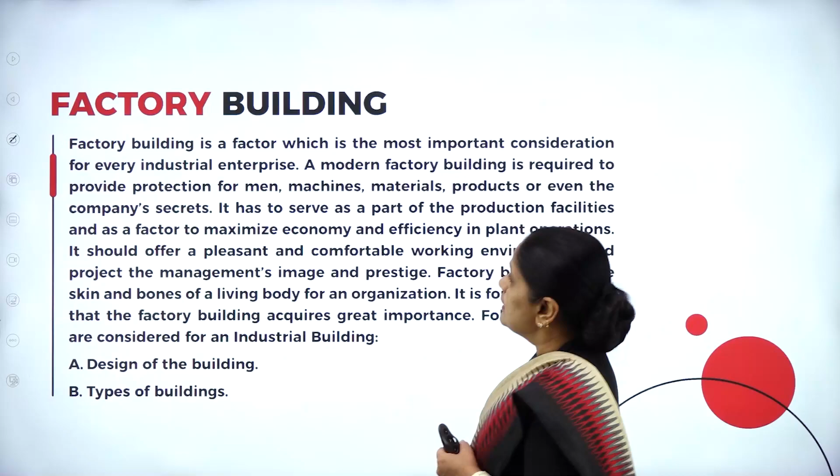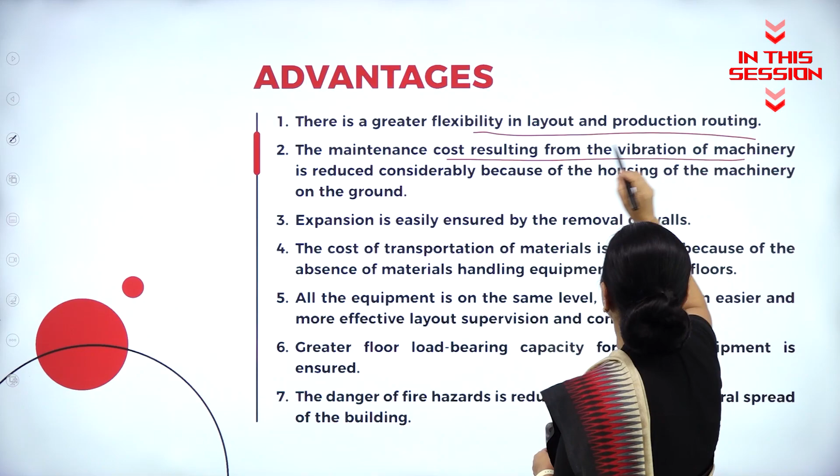The factory building is a factor which is the most important consideration for every industrial enterprise. The type of product that is to be manufactured determines column spacing, type of floor, ceiling, heating, and air conditioning. The maintenance cost resulting from the vibration of machinery is reduced considerably because of the housing of the machinery on the ground.

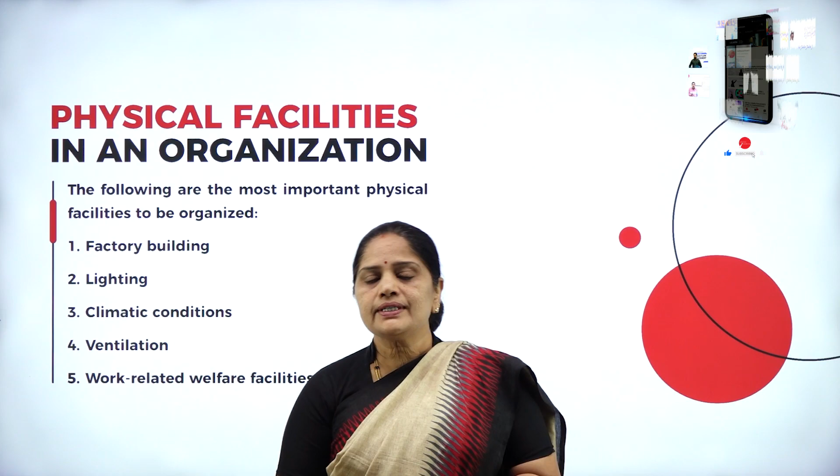In this session 2 of Unit 2, we will be having a discussion on the physical facilities in an organization. In the previous session, we had a discussion on the plant layout and also the plant location. How do we choose the plant location and how do we design the layout? We also have discussed the various types of layouts which are in existence. And in this session, we will be having a discussion on the physical facilities in an organization.

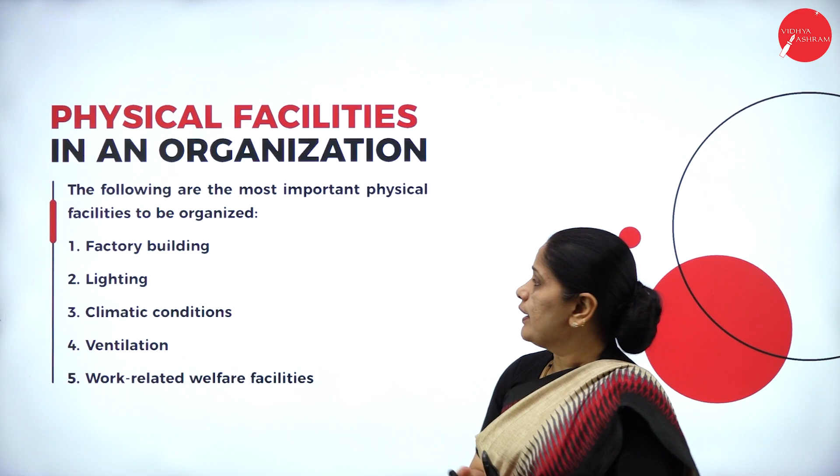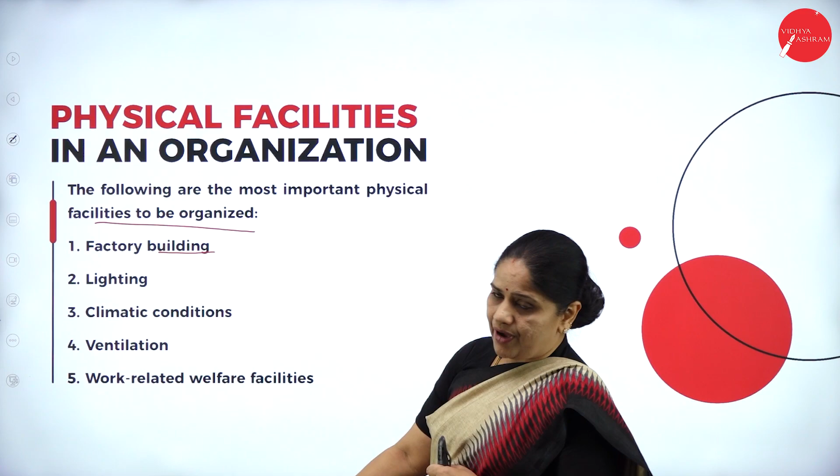Now, the following are the most important physical facilities to be organized. So, what are the various facilities which we need to design in the case of a plant layout or a factory layout? There are certain physical facilities. So what are they? The first one is the factory building. We need to have a proper factory building. Second and the most important one is the lighting. It should be well lit.

Third one is the climatic conditions. The fourth one is ventilation. Fifth one is work-related welfare facilities. These are the various physical facilities in an organization. Now, coming to the first one, the factory building. The factory building is a factor which is the most important consideration for every industrial enterprise. So, for every industrial enterprise, we need a factory building.

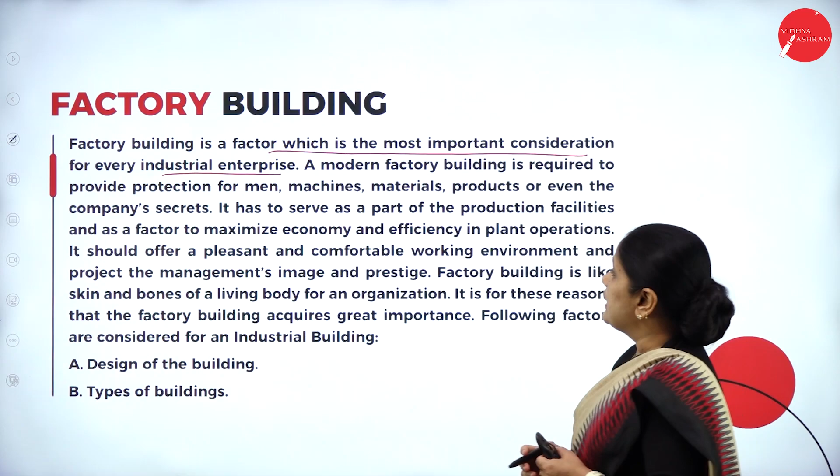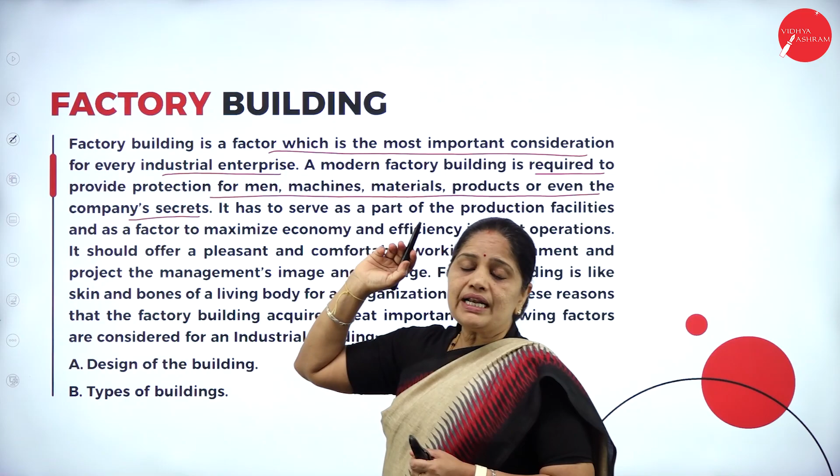A modern factory building is required to provide protection for men, machines, materials, products, or even the company secrets. A building is provided because it provides shelter for men, materials, and the machines, etc. In order to provide shelter for all this, we need to have a factory building. It has to serve as a part of the production facilities and as a factor to maximize economy and efficiency in plant operations.

So, whenever we are working in the factory, it should provide maximum economy and also efficiency in operations. We should try to see that there is minimum movement of men and materials within the factory. If we can reduce the movement of materials and men, we will be saving on the material handling cost and also the time and the various confusions which will arise when there is a zigzag movement of men and material in the factory layout.

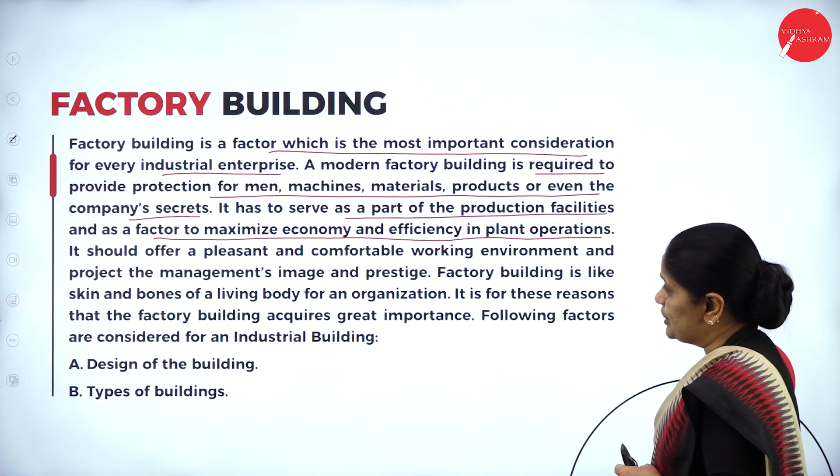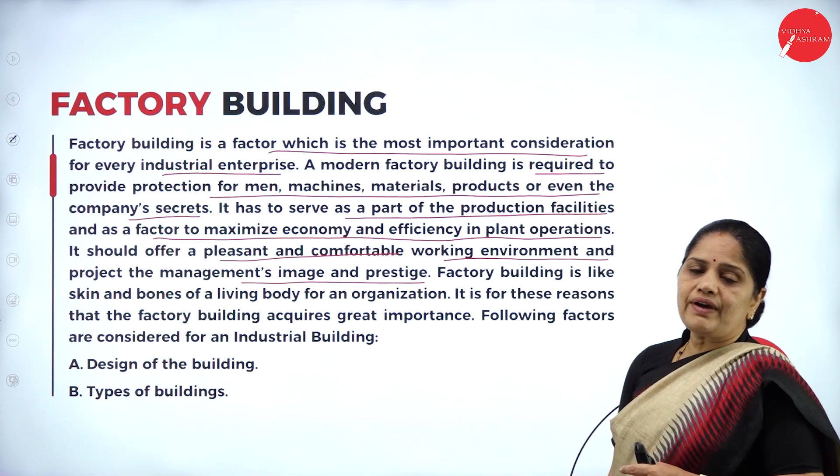It should offer a pleasant and comfortable working environment and project the management's image and prestige. The factory layout should be designed in such a way that it is comfortable and more pleasurable to work in. If the working conditions are very suitable for work, then workers will be stress-free and they will work with more diligence and more efficiency. But if the working conditions are not good, workers may not find it favorable to work in such an environment.

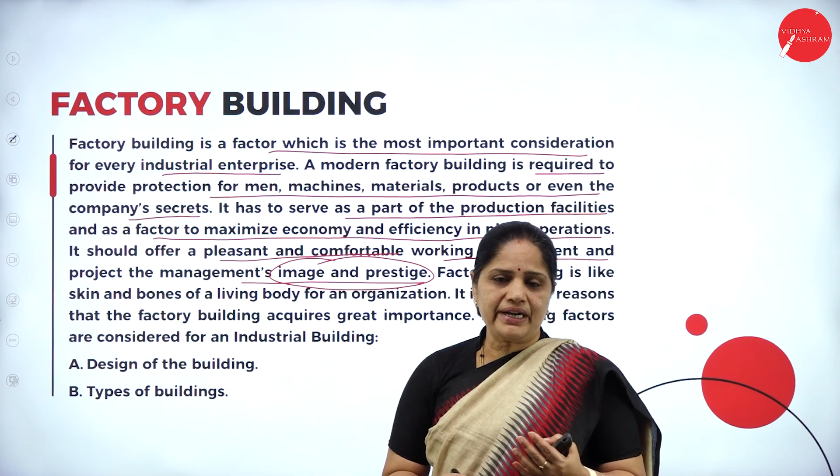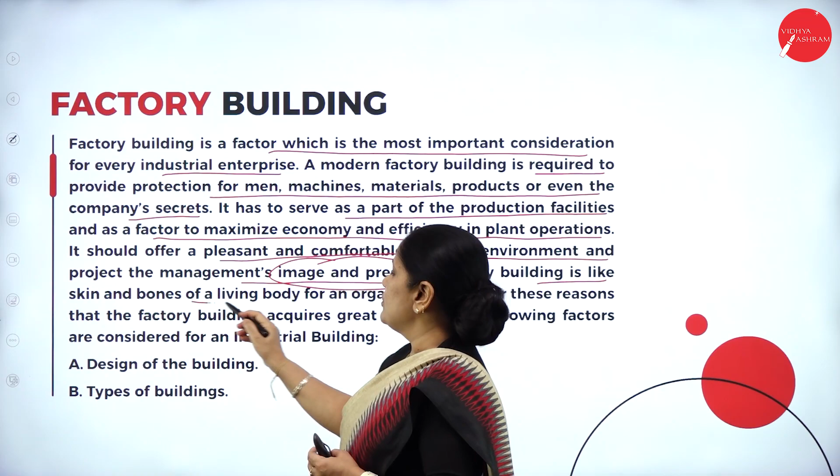So, the kind of work environment the management is providing will reflect on the image and the prestige of the management. Factory building is like skin and bones of a living body of an organization. Just like the human body is made up of skin and bones, the same way the factory building is the main factor for the success of any organization. It is for these reasons the factory building acquires great importance.

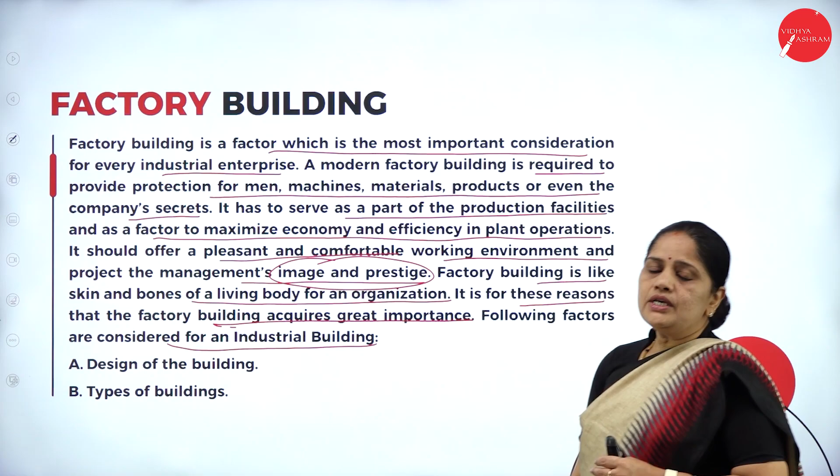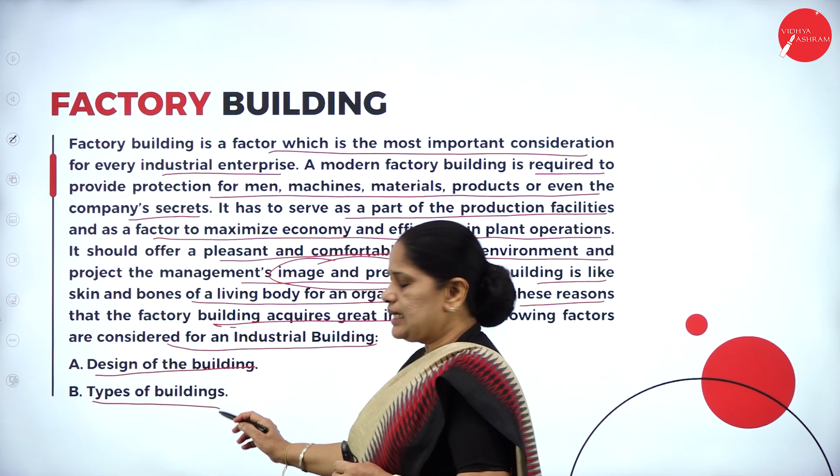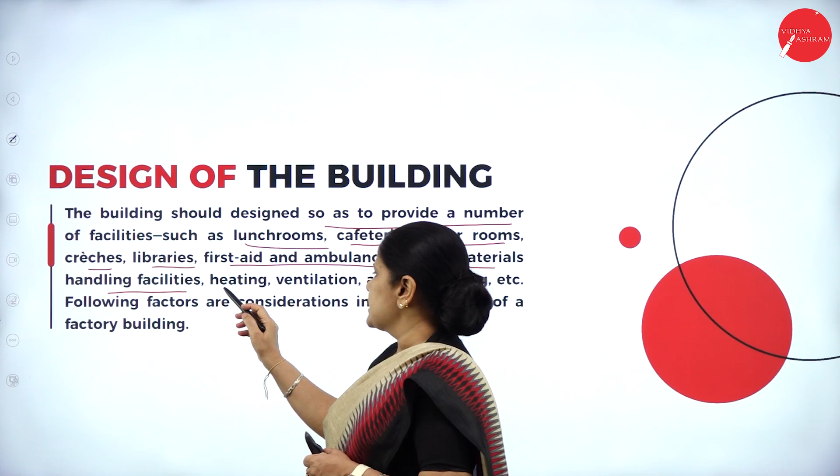The following factors are considered for an industrial building. In order to have an industrial building, there are two factors which we should consider. First is the design of the building. Second one is the types of building. So let us see what we mean by design of the building. The building should be designed so as to provide a number of facilities such as lunch rooms, cafeteria, locker rooms, creches, libraries, first aid and ambulance rooms, material handling facilities, heating, ventilation, air conditioning, etc.

So, the design of the building should include many provisions. Whenever we find so many employees working under the same roof, we should make some provisions for their stay there. So, what are the various facilities which we should provide here? The first one is the lunch room. The workers will be spending almost 9 to 10 hours in the factory building, and therefore it is obvious that they'll be having lunch.

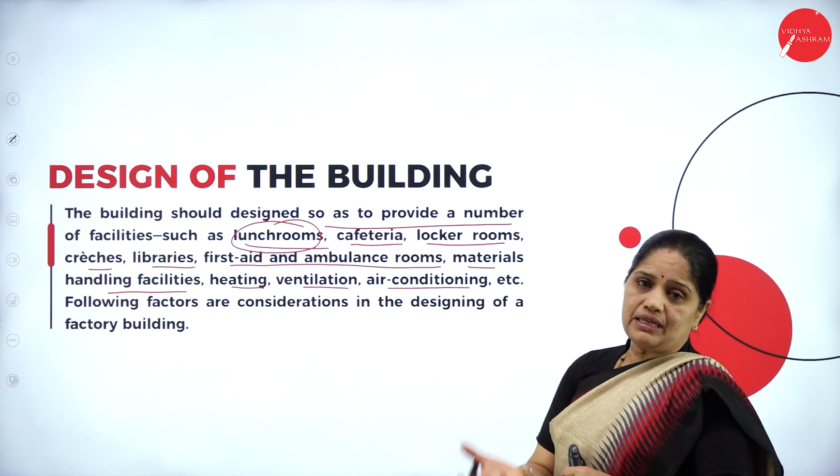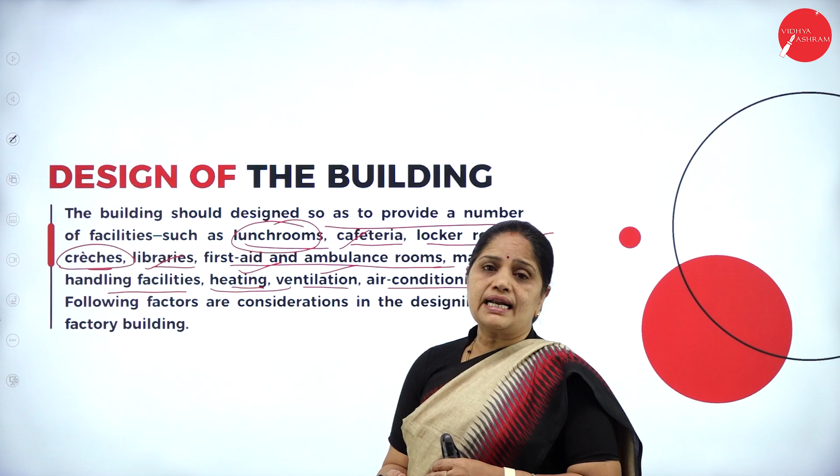So we need to provide a lunchroom, a cafeteria where they can have coffee, then locker rooms where the employees can keep their valuables, then creches, which is for the women labor. Next we have libraries, first aid and ambulance rooms, and material handling facilities. Whenever there is material to be handled, what facilities are we providing? What kind of heating facilities do we have? If it is a cold country, we should provide heating, then ventilation, air conditioning, etc. These are the various facilities we need in a factory building.

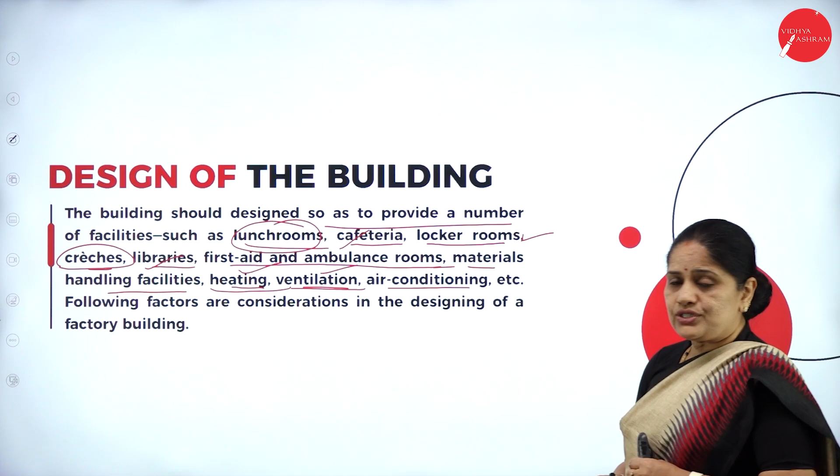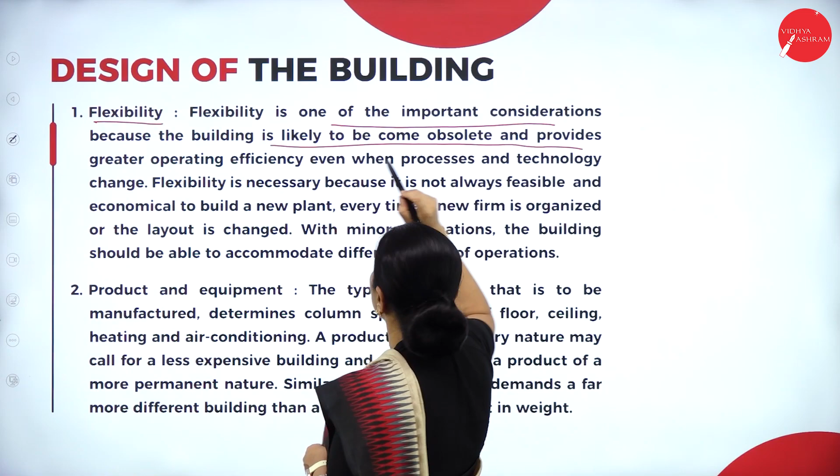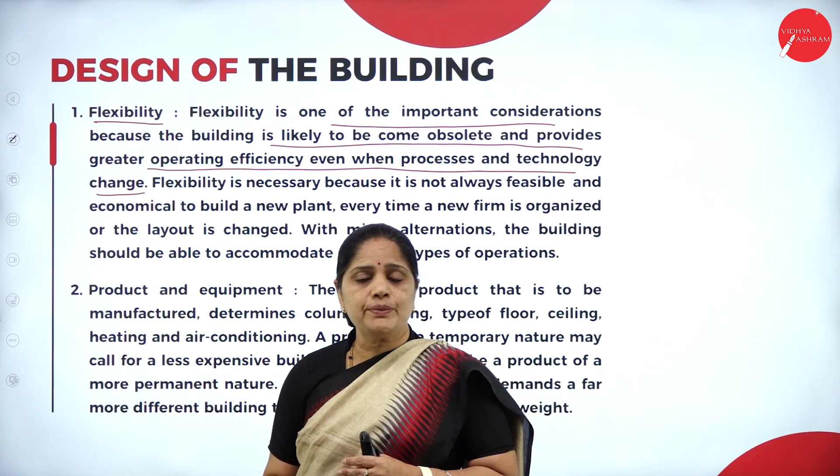Then the next one is the design of the building. How should we design a factory building? The first one is flexibility. Flexibility is one of the important considerations because the building is likely to become obsolete, and it provides greater operating efficiency even when processes and technology change. We all know that every day new technology is coming into the market, and the same is with the machines. Whatever machines we have purchased may soon get outdated, within a span of 2 to 3 years.

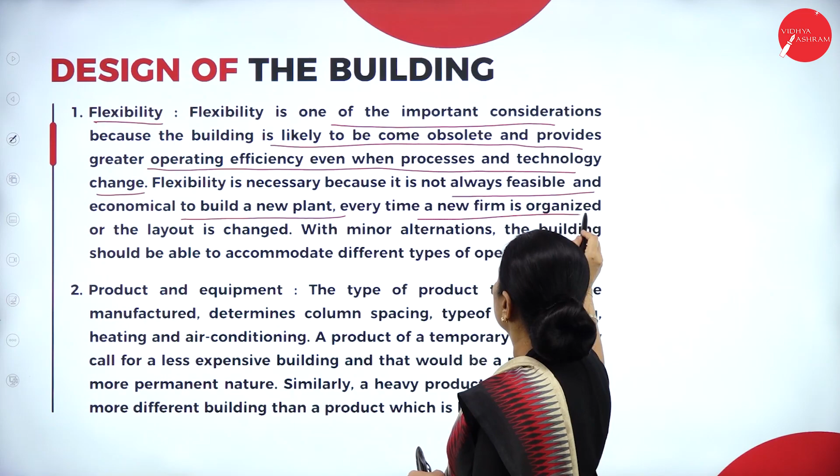As a result, we need to design the factory building so that there will be more flexibility and more room for new machinery, so the old machinery can be replaced with new machinery. The factory building should provide greater flexibility for incorporating the latest technology within the organization. It is necessary because it is not always feasible and economical to build a new plant every time a new firm is organized or the layout is changed.

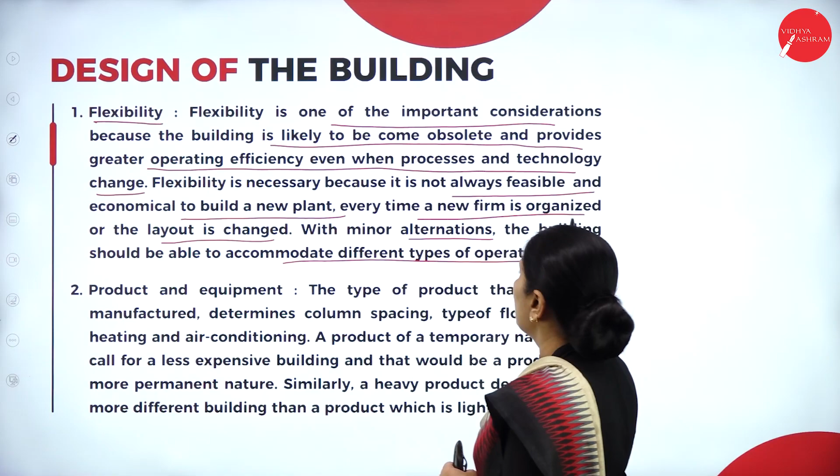With new technology, you will have to change the layout, but every time you change the layout, you need not change the building. The building should be flexible enough to overcome all the changes in the plant layout. We should ensure the building is flexible with minor alterations and able to accommodate different types of operations. With a minimum of alteration to the building, we should be able to accommodate the latest technology in the plant layout.

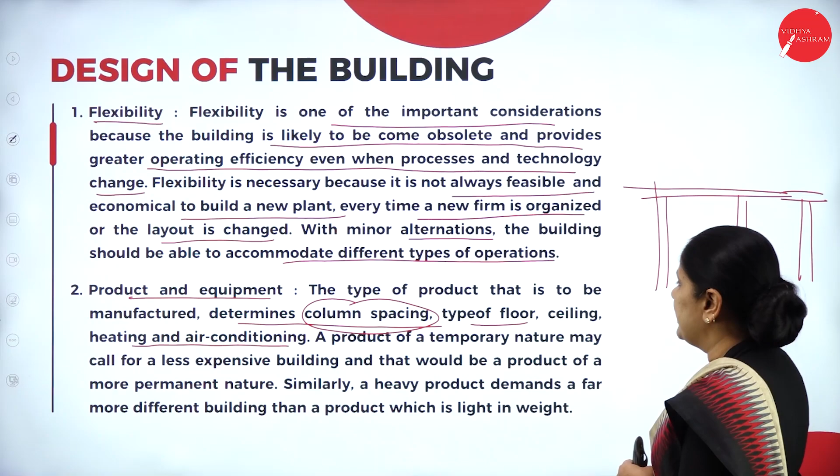Then the second one is product and equipment. The type of product to be manufactured determines column spacing, type of floor, ceiling, heating and air conditioning. Column spacing means where the pillars will be erected for the factory building. Then type of floor, what kind of flooring you need. Then ceiling, what kind of ceiling you have. Then heating and air conditioning.

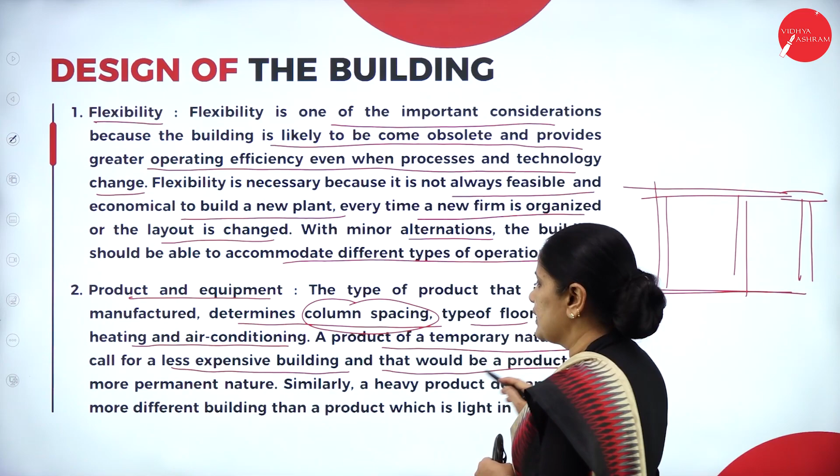This is essential. A product of temporary nature may call for a less expensive building than a product of more permanent nature. It all depends on the type of product being produced. If it is a temporary product, we need not have a more expensive building. But if the product is of a permanent nature, we need a building which is stronger and able to withstand all the vagaries of the weather.

Similarly, a heavy product demands a far different building than a product which is light in weight. So depending on the nature of the product, if it is very heavy, we need a different building, and if it is lightweight, we also have a different design of the building.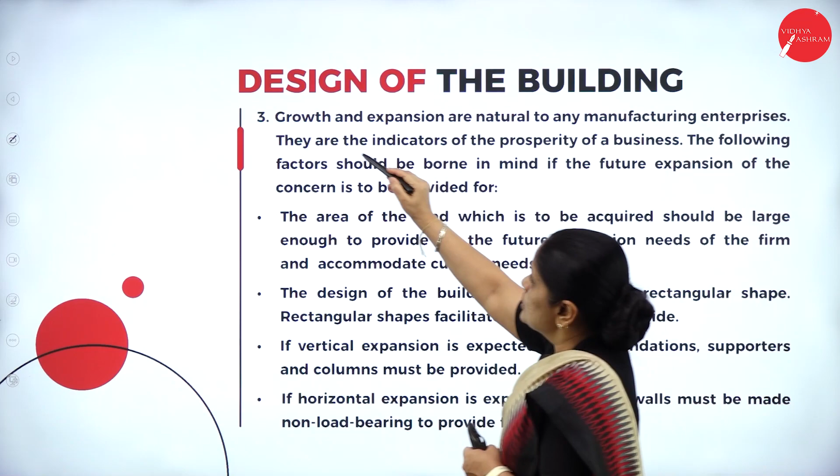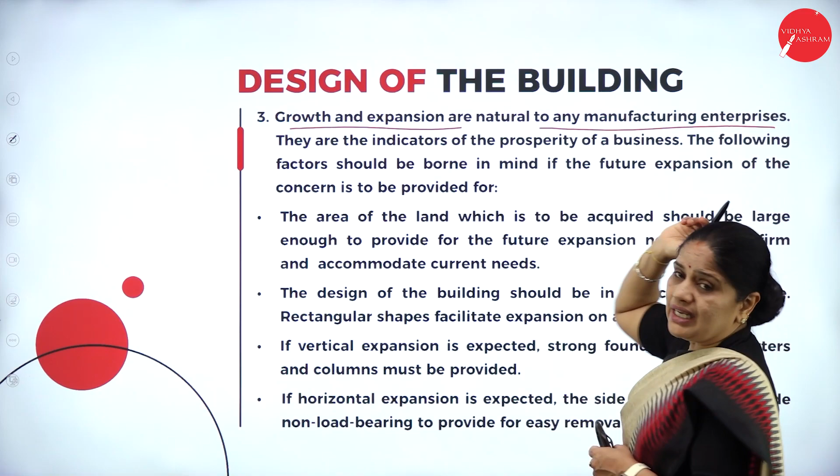Then the next one is growth and expansion. We should understand that any organization will have growth and expansion plans. Growth and expansion are natural to any manufacturing enterprise; they are indicators of the prosperity of a business. The following factors should be borne in mind if future expansion of the concern is to be provided for.

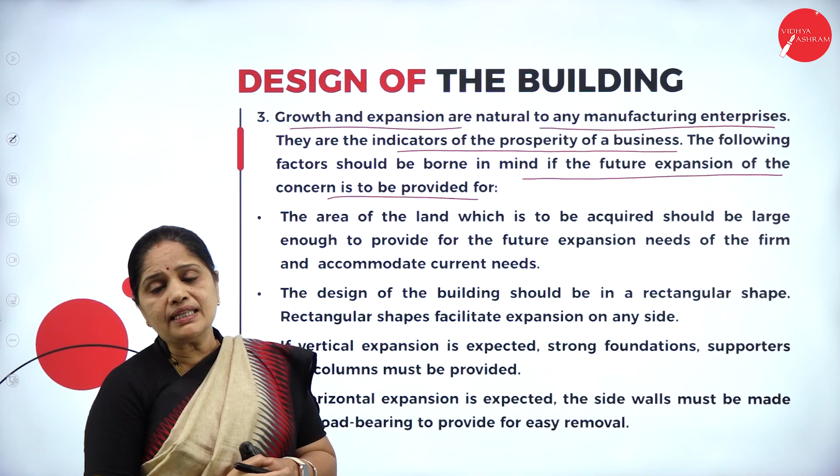So if the company has future expansion plans, if they have more growth plans, then what are the factors to be considered when you are designing the building? So the area of the land which is to be acquired should be large enough to provide for the future expansion needs of the firm and accommodate the current needs.

So whenever you are designing the building, it all depends on the kind of area. What is the space you are having? What is the measurement of the land which the management has? So the land acquired should be large enough to provide for the expansion plans of the organization.

Then second one, the design of the building should be in a rectangular shape. It facilitates expansion on any side. If the building is in a rectangular shape, then you can add additions to the building so that it will not look odd. But if the building is of some other shape, then any extension may just damage the design of the building. If vertical expansion is expected, strong foundations, supporters and columns must be provided.

So when we are having a vertical expansion, that is, if the management plans to have one more floor over the existing floor, then we should see that the building has strong foundations and supporting columns, etc. Then if horizontal expansion is expected, the side walls must be non-load bearing to provide easy removal.

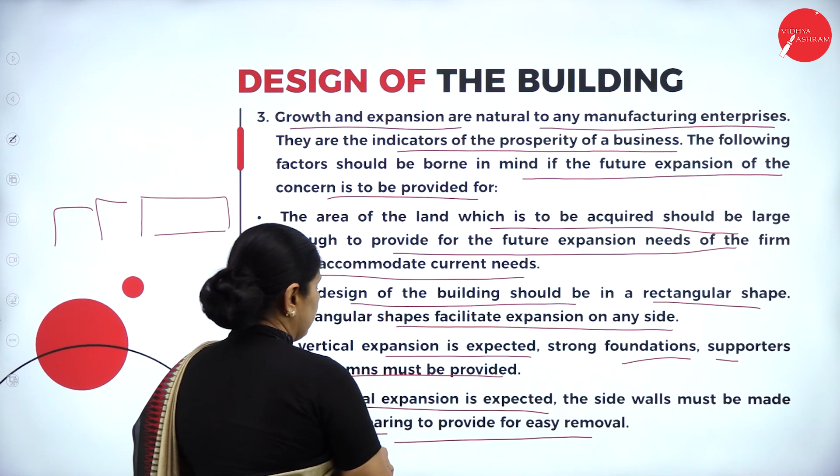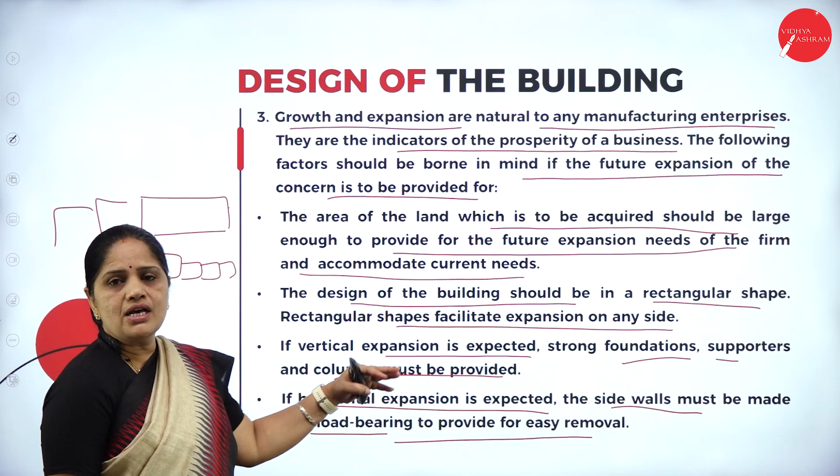So suppose the management plans to have a horizontal expansion of the plant building. If they are planning to have a horizontal expansion of the building, then it is better to have non-load bearing side walls so that the side walls can be easily removed and the room can be extended depending on the necessity.

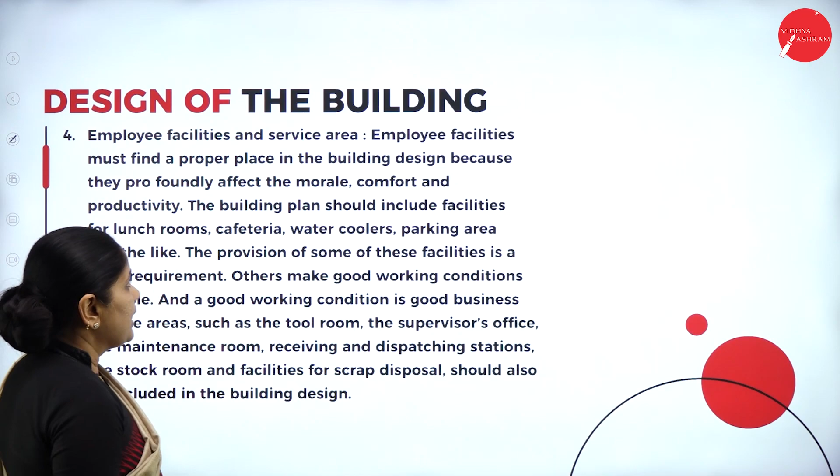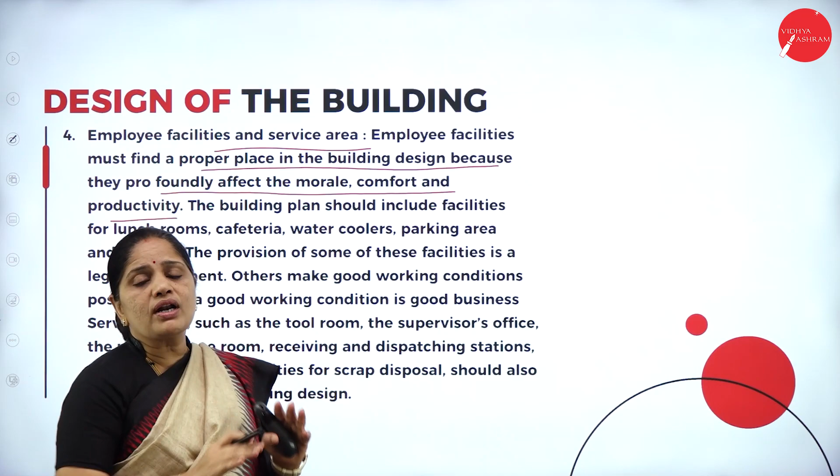The next one, employee facilities and service area. Employee facilities and service areas must find a proper place in the building design because they affect the morale, comfort and productivity. So the building's design should be in such a way that it should be more comfortable to the employees. The building plan should include facilities for lunchrooms, cafeteria, water coolers, parking area and the like. So for the employees, we should have provision for lunchrooms, cafeteria, parking area, etc.

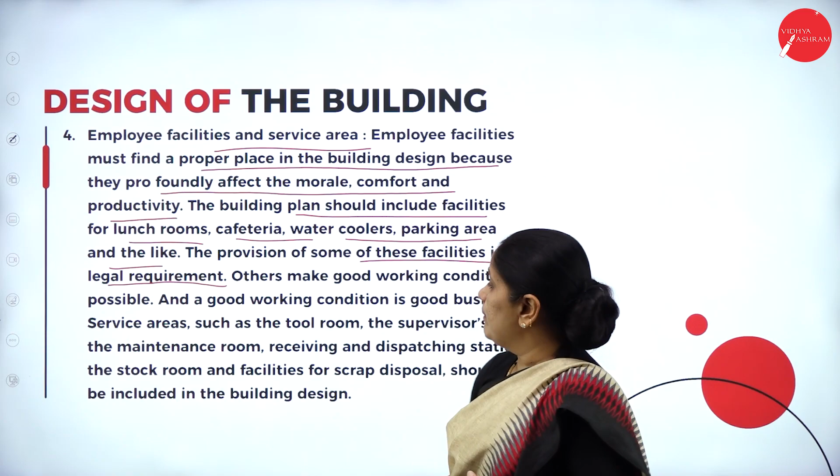The provision of some of these facilities is a legal requirement. The law says that wherever more than the number of people specified by law are working in the organization, there are certain facilities which are to be provided to the employees. Others make good working conditions possible, and a good working condition is good business.

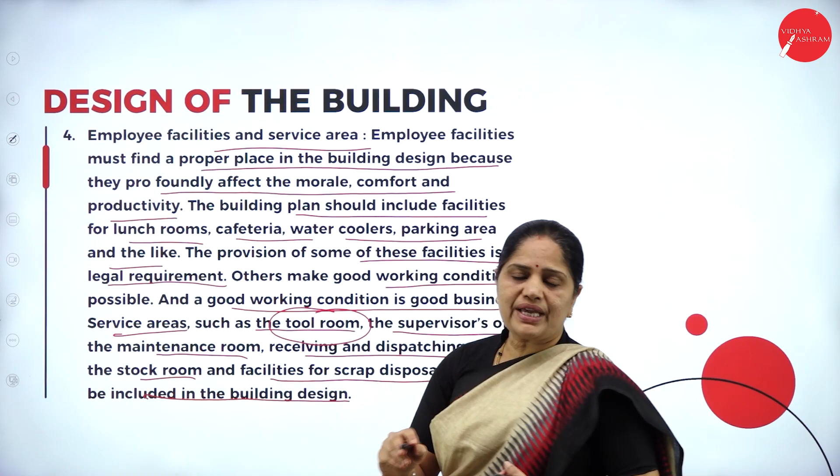Service areas such as the tool room, the supervisor's office, the maintenance rooms, the receiving and dispatching stations, the stock room, and facilities for scrap disposal should also be included in the building design. So we need service areas. What is the service area we need? We need the tool room. Tool room means it is the room where all the tools necessary for production will be kept. Then the supervisor's office. The supervisor will be supervising the work in the factory, and we need to have a provision for the supervisor's office.

Then we need to have a maintenance room. The maintenance room will take care of all the electrical equipment and everything. Then receiving and dispatching stations: the materials which we will be receiving, and also the output that comes out of the factory, which we will be dispatching outside. For that we need a proper station. Then the stock room, where there will be a stock of raw materials and finished goods. For that we need a provision for the stock room.

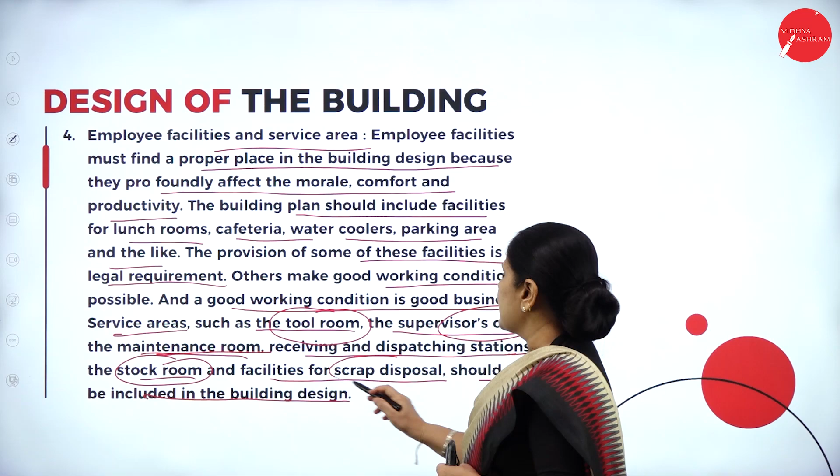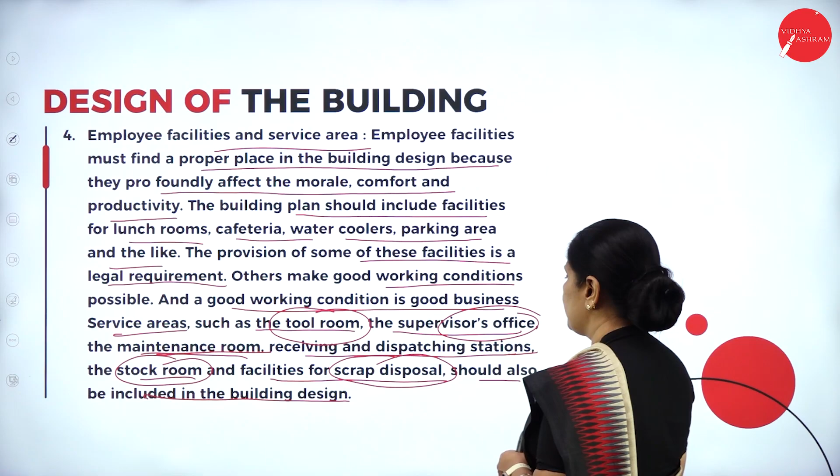Facilities for scrap disposal. Whatever waste comes out of the factory has to be disposed of very well. So the facilities you are providing for waste disposal should also be included in the building design. Whenever we are designing the factory building, all these things should be thought about. Then next one is the types of building.

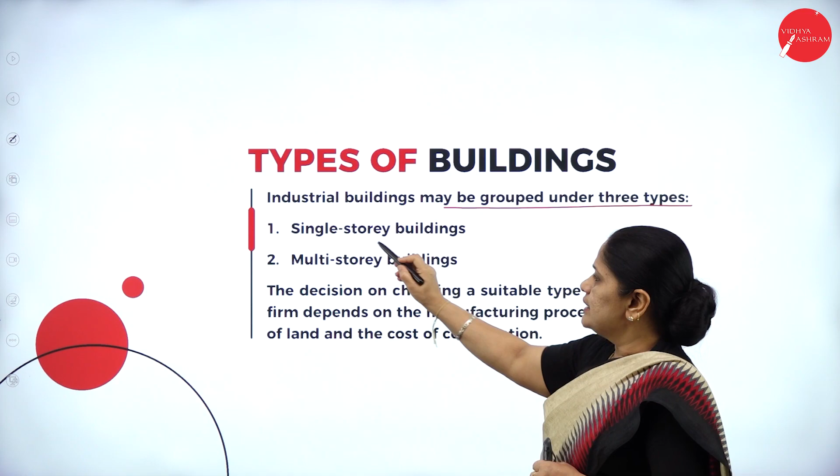The industrial buildings may be grouped under two types: the single story building and the multi-story building. Single story building means only one single story, that is, only the ground floor will be there. Multi-story building means it will be in floors.

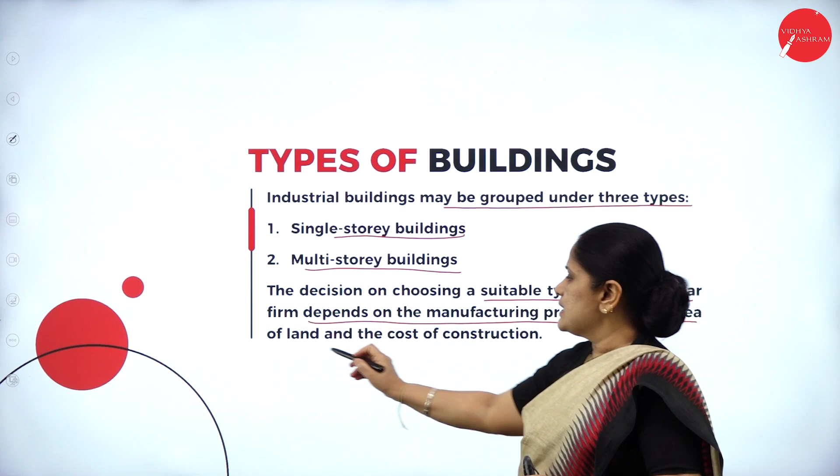So first floor, second floor, third floor, fourth floor. So multi-story means you will have more floors, whereas single story means only the ground floor will be there. The decision on choosing a suitable type for a particular firm depends on the manufacturing process, the area of land and the cost of the construction. So depending on the type of manufacturing, we will have to decide what kind of a building we need.

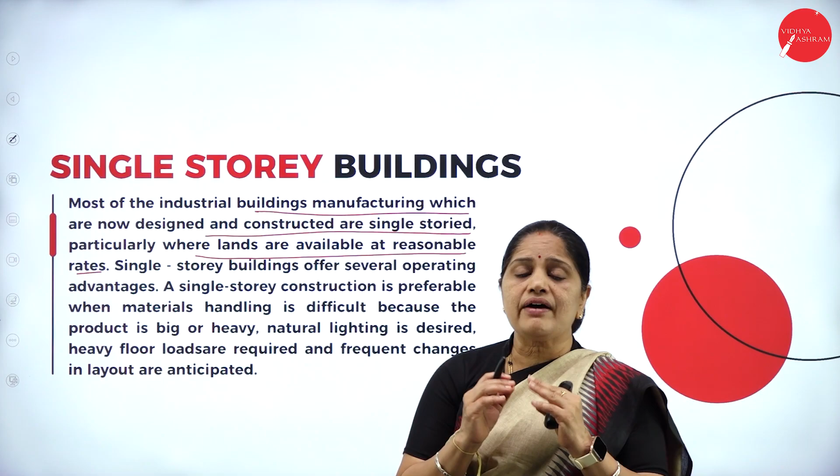Then the first one is the single story building. Most of the industrial buildings which are now designed and constructed are single storied, particularly where lands are available at reasonable rates. Now we have observed that the government is giving a lot of encouragement for setting up factories, where it creates a lot of employment. As a result, the government makes land available for the industrialists. So if the land is available cheaply, the industries can go in for a large area of land, wherein a single storied building will be sufficient.

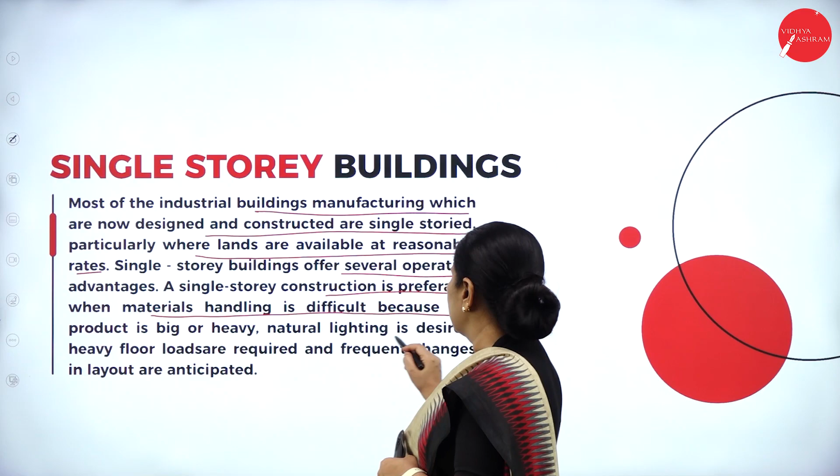Single storied buildings offer several operating advantages. The construction is preferable when material handling is difficult because the product is big or heavy, natural lighting is desired, heavy floor loads are required, and frequent changes in layout are anticipated. So a single storied building is usually recommended where the product is very heavy and when you need proper lighting, etc. But if you have a very light kind of product, then you can go in for a multi-storied building.

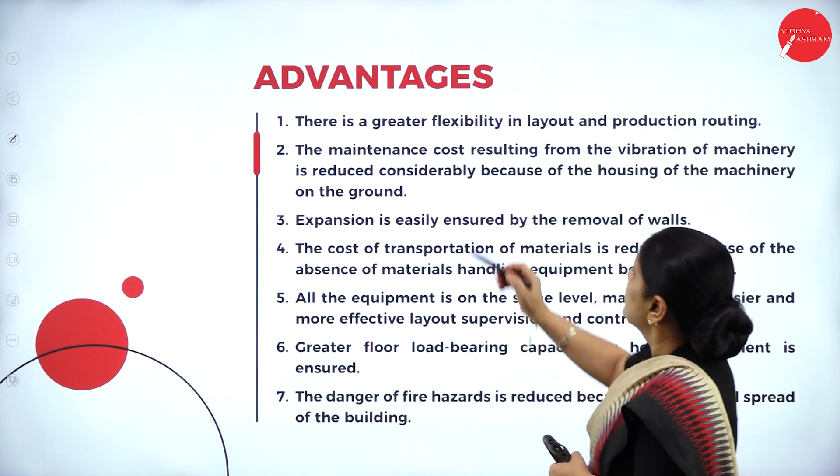Then what are the advantages of a single story building? There is greater flexibility in layout and production routing. When you have a single storied building, you can have a spacious room wherein there will be flexibility in layout. So the layout can be planned very extensively, and the routing of the materials can also be done extensively.

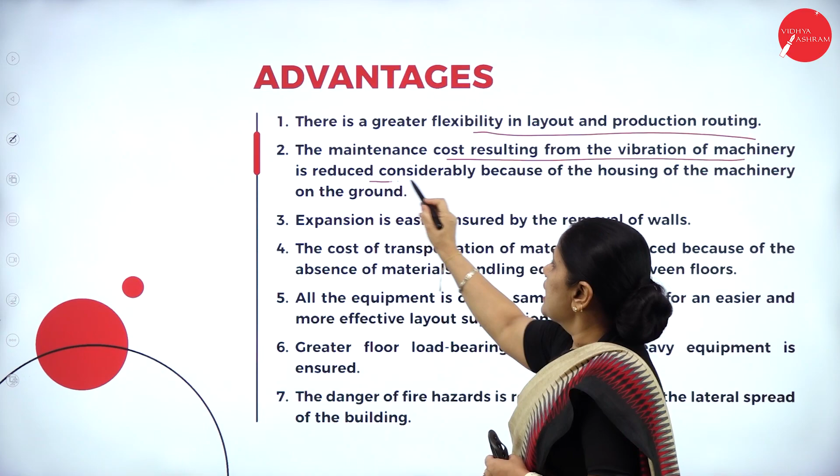Then the maintenance cost resulting from the vibration of machinery is reduced considerably because of the housing of the machinery on the ground. In a single storied building, the machine will be on the ground floor itself, so you need not spend more on reducing the vibration of the building. If it is the second or third floor, then you will have to see that the building is very strong so that it will tolerate the vibration created by the machinery.

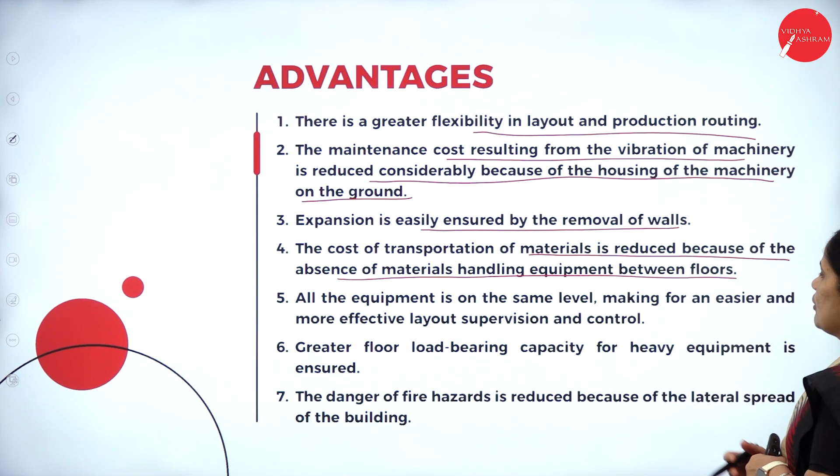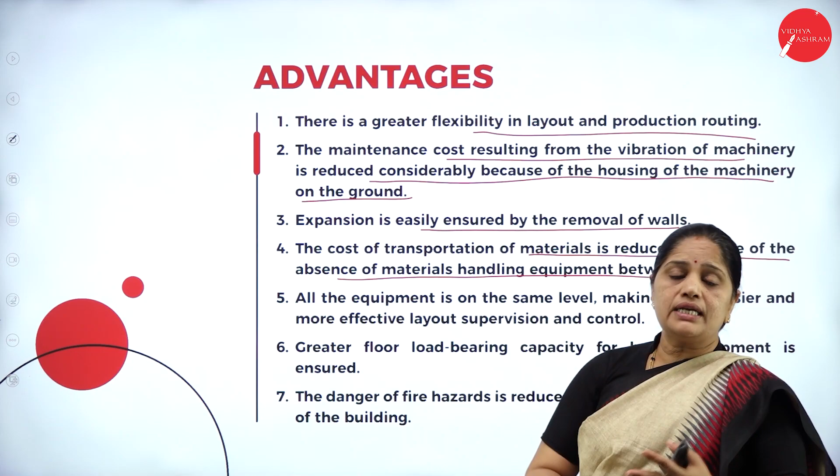Expansion is easily ensured by the removal of walls. If it is a single storied building, the expansion can be easily done just by removing one of the walls, so you can extend the factory building easily. The cost of transportation of materials is reduced because of the absence of material handling equipment between the floors. Otherwise you will have to transfer the stock material from one floor to another, and for that you need some material handling equipment. This can be reduced if you have all the machinery on the same floor.

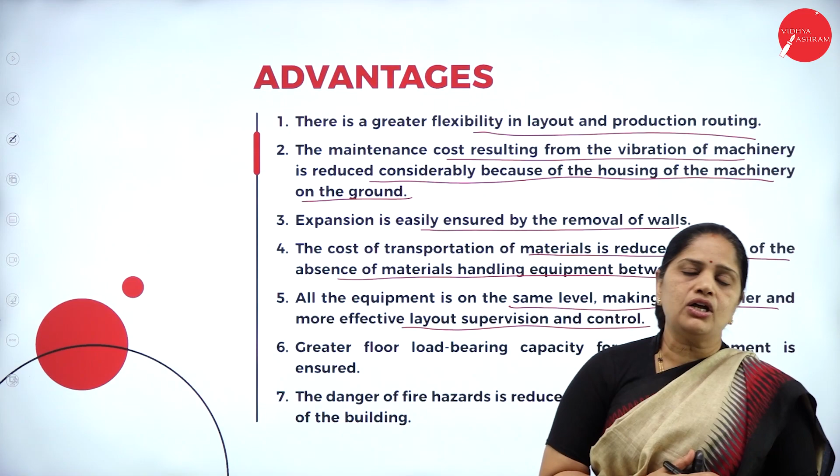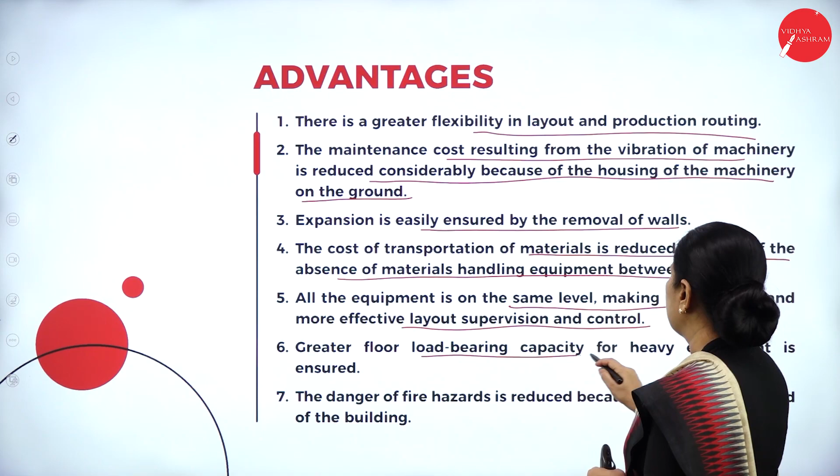Then all the equipment is on the same level, making for an easier and more effective layout, supervision and control. If all the operations are carried on on the same floor, then supervision becomes easy and control also becomes very easy. Then greater floor load bearing capacity for heavy equipment is ensured. When you have heavy equipment for production, that can be easily handled in a single storied building.

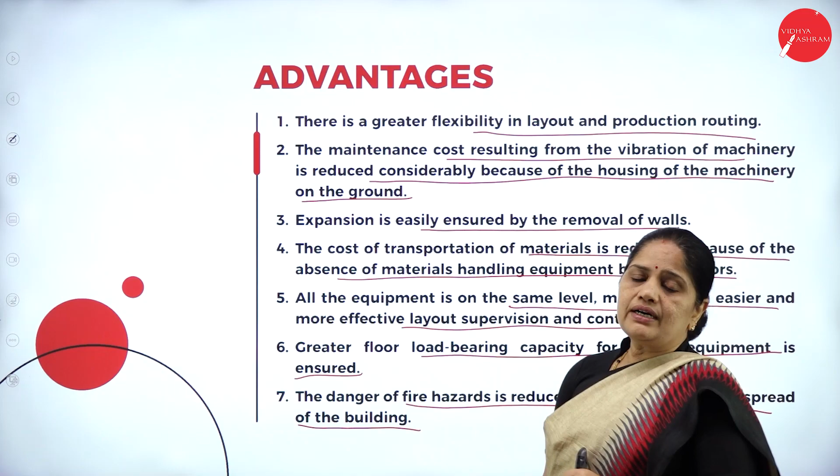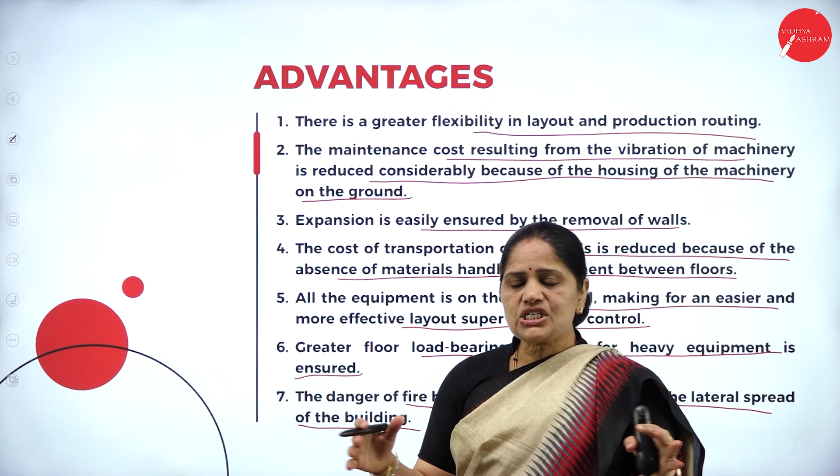The danger of fire hazards is reduced because of the lateral spread of the building. If it is only a single storied building, fire hazards can be reduced to a great extent because there will be lateral exits, so people can rush away from the building if there is a fire. But in a multi-storied building, the people on the top floor have to rush to the ground floor in order to exit the building. All these confusions can be avoided in a single storied building.

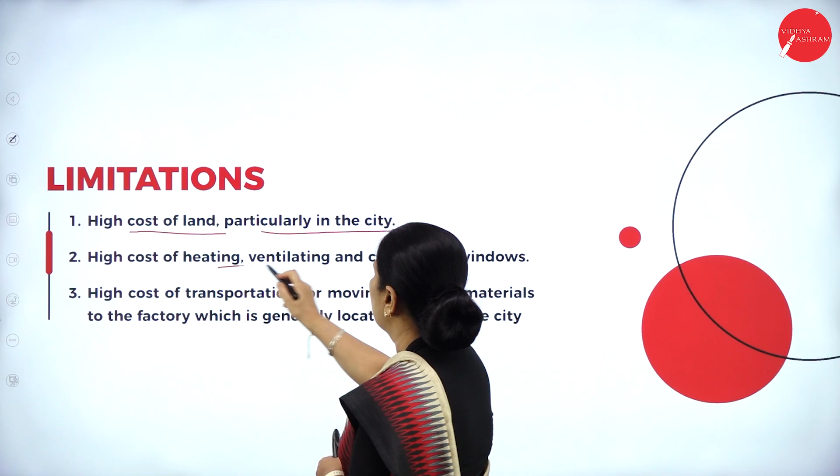Next, what are the limitations here? The high cost of land, particularly in the city. The land cost will be very high, especially in urban areas. The high cost of heating, ventilating and cleaning of windows. So we will need a lot of windows, and we need a lot of heating and ventilation.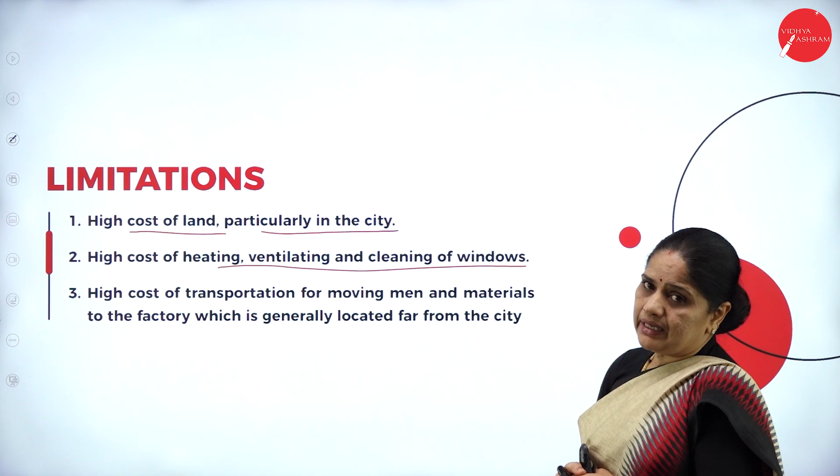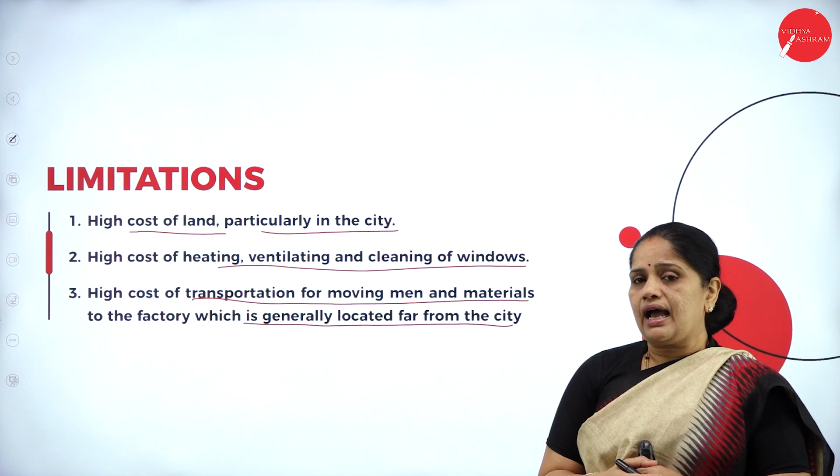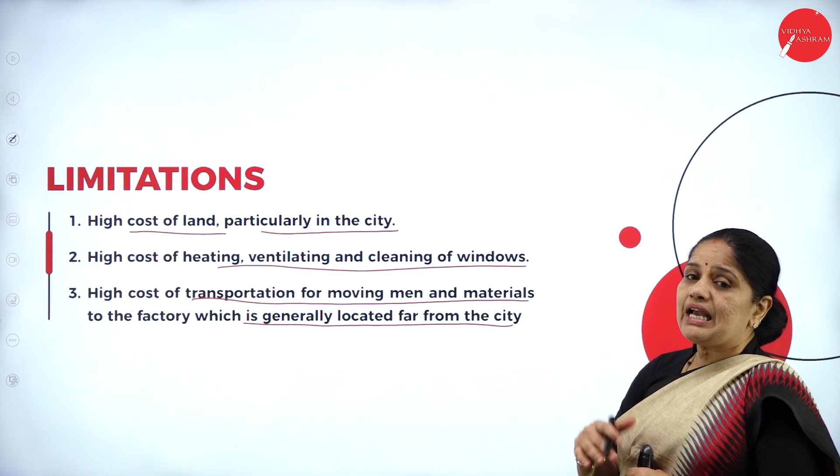So all this cleaning will be a heavy expenditure. Then there is the high cost of transportation for moving men and materials to the factory, which is generally located far from the city. If your industrial area is far away from the city, you will get a large area of land. But if you have to move the men and machines to the plant site, then again you need transportation, so this will add to the expenditure of the organization.

Then the next one is the multi-story building. Multi-story buildings are used for schools, colleges, shopping complexes and residences, and for service industries like software, BPO, etc. Multi-story structures are generally popular, particularly in the cities. So schools, colleges, shopping malls, hospitals, etc. will all be housed in a multi-storied building.

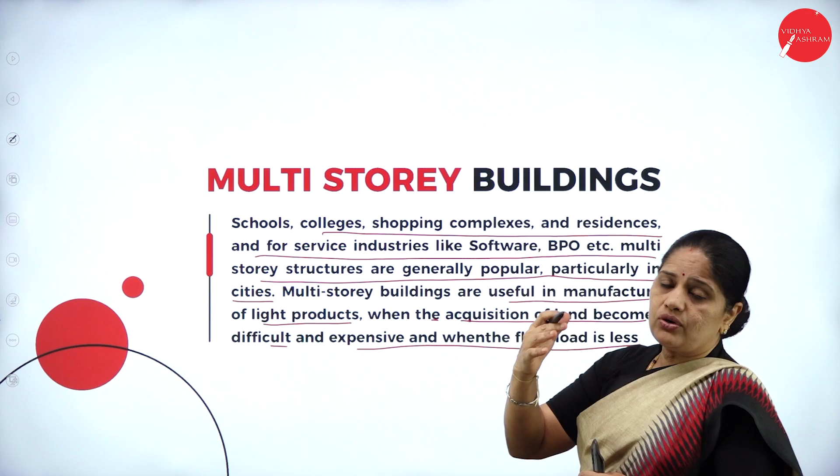They are useful in the manufacture of light products when the acquisition of land becomes difficult and expensive and when the floor load is less. So a multi-storied building is recommended where the land cost is very high. Within a small space you can have all the areas; you can construct floors above floors so that you get all the facilities in the same place. It is usually for light products or small products.

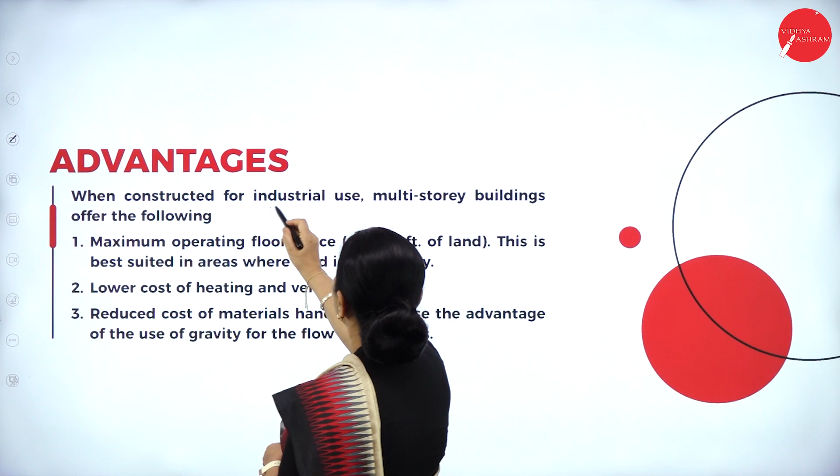Then what are the advantages? When constructed for industrial use, multi-story buildings offer the following. The maximum operating floor space per square foot of land; this is best suited in areas where land is very costly. So in a multi-story building, whatever land is available, if you have it in the form of floors, you can make use of the maximum space.

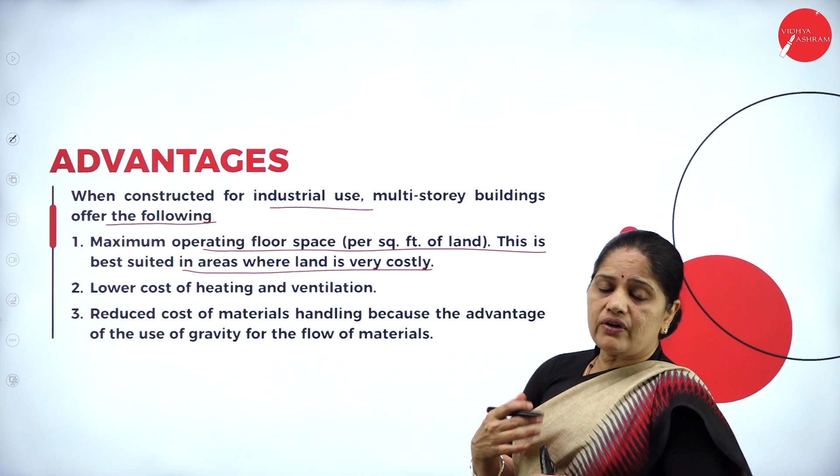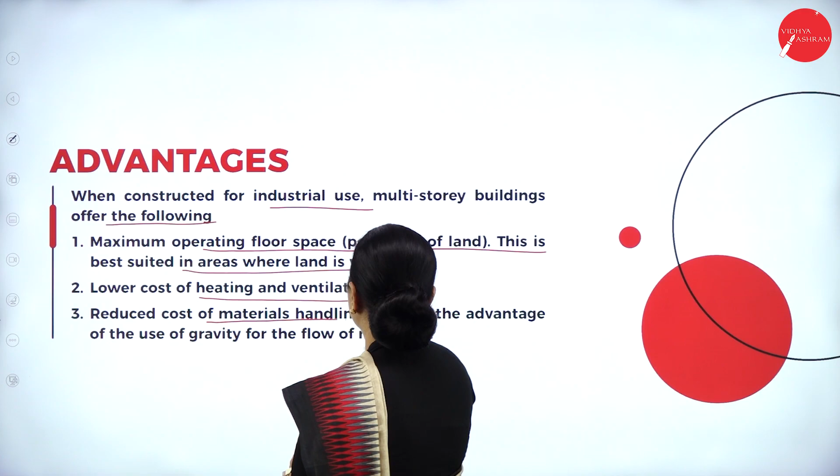Then lower cost of heating and ventilation. Since it is all housed one floor above the other, the heating, lighting and ventilation cost will be less. Then reduced cost of material handling, because of the use of gravity for the flow of materials. Whatever is produced on the higher floors can be easily sent to the floors below. So these are the advantages of having a multi-story building.

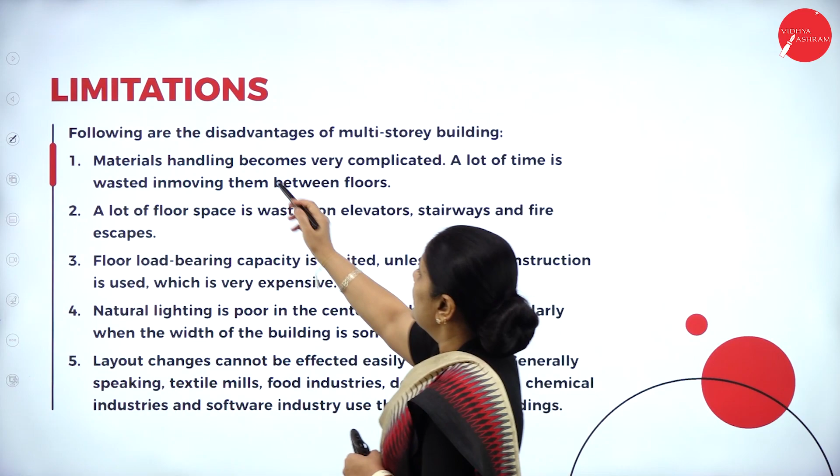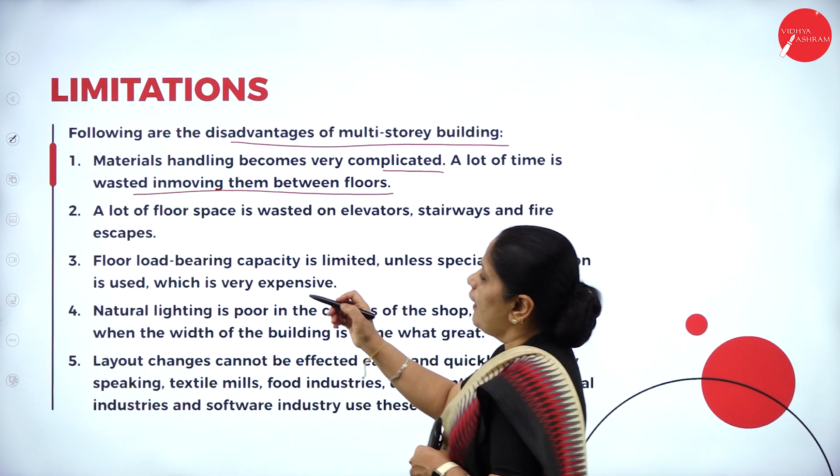Then what are the limitations? Material handling becomes very complicated; a lot of time is wasted in moving materials from one floor to another. Second, a lot of floor space is wasted on elevators, stairways and fire escapes. In a multi-story building you need to have provision for elevators, staircases and fire escapes.

Then floor load bearing capacity is limited unless special construction is used, which is very expensive. The load bearing capacity of the floor has to be thought of when accommodating machinery on the floors. We need a strong building so that it will bear the weight of the heavy machines, so construction becomes expensive.

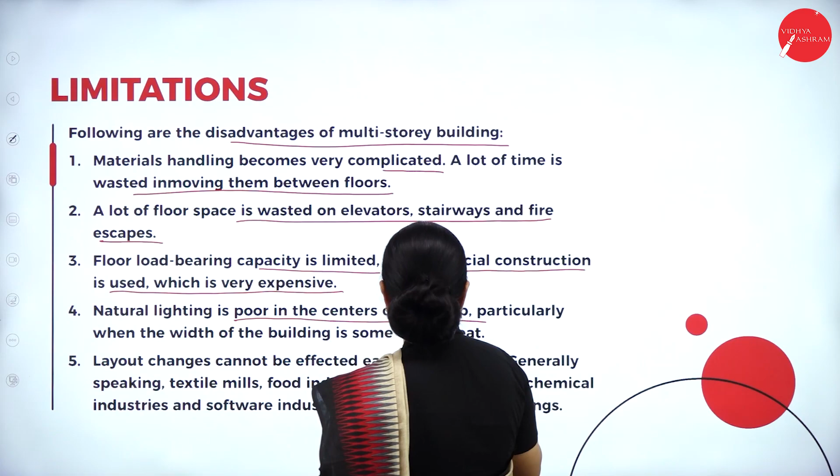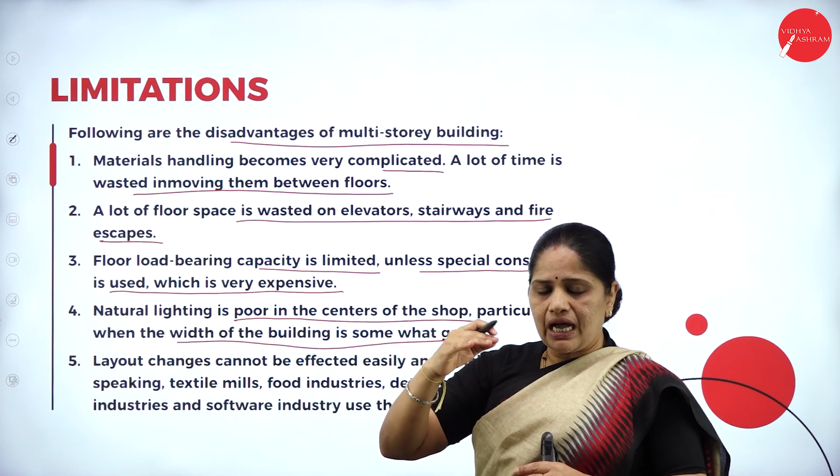Then natural lighting is poor in the centers of the shop, particularly when the width of the building is great. Usually the lighting will be poor in a multi-storied building. If the height of the floors is very less, we cannot expect proper lighting on all the floors, so this becomes a problem.

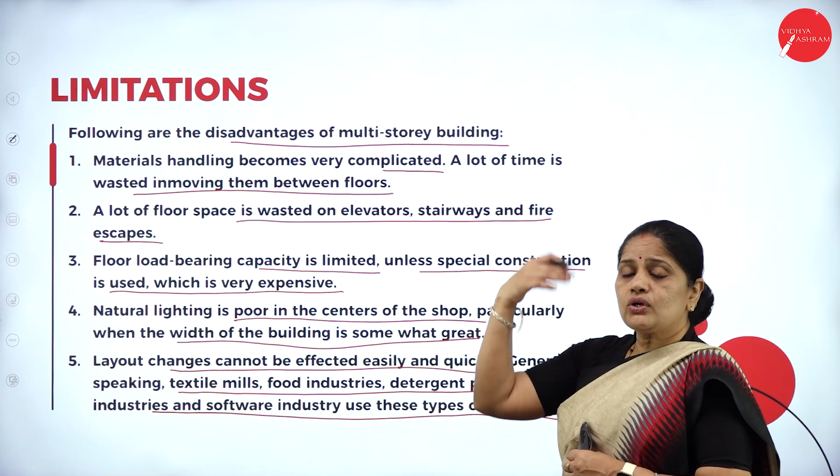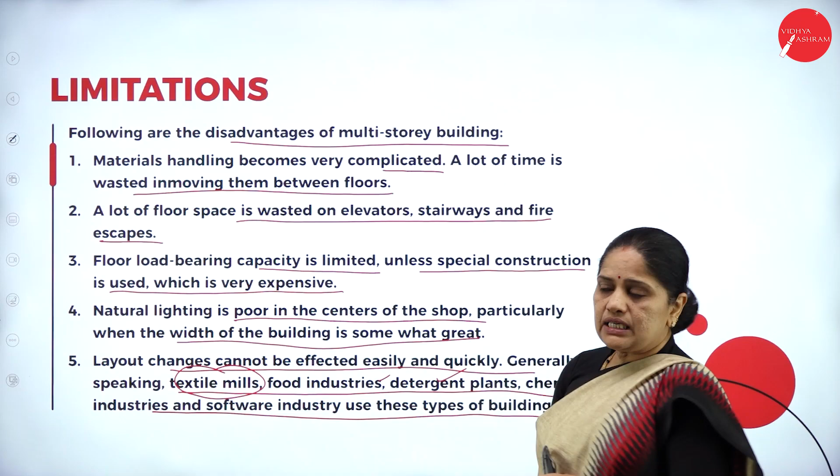Then layout changes cannot be effected easily and quickly. If we need an expansion of the building, it becomes very difficult because we have to create one more floor above the existing structure. Generally speaking, textile mills, food industries, detergent plants, chemical industries and software industries use these types of buildings.